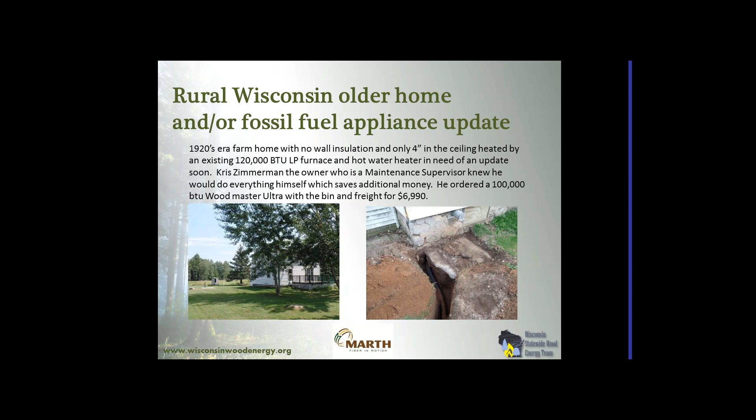That's actually a Swedish manufactured combustion system that's installed in a variety of appliances, from forced air furnaces as well as boilers. This is a boiler, and that controls the fuel to air ratio based off of thermostat demands on the inside.

And so that unit that's totally outside the house with the little bin you see there on the lower right, and he decided he wanted to do bagged products, so he could go buy the product when he felt it was most cost effective for him over the summer months, for pellets in this case. And that's how the basics of the installation look.

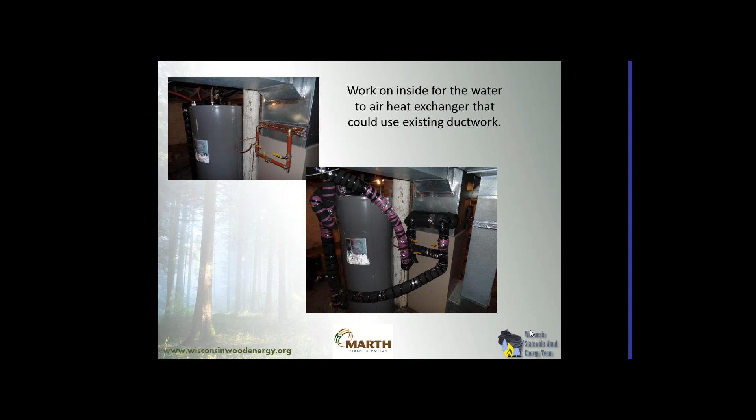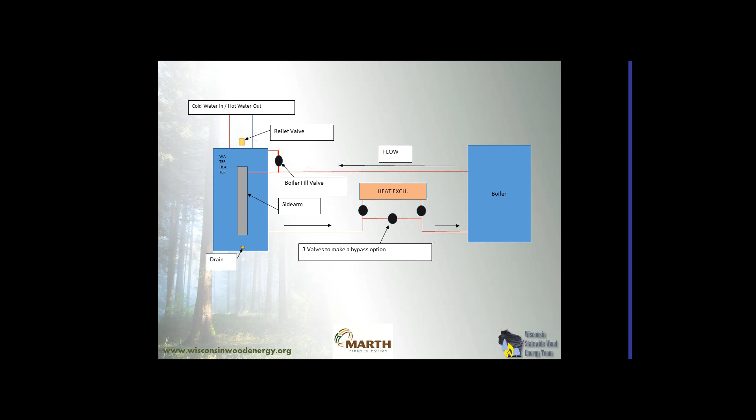If you could move on to the next one, Scott.

And so this just gives you a good idea. Here again, this is not the average homeowner, but it gives you an idea of the recording that he did and validates the savings he's going to have. So for the season so far, he had used about 460 bags worth of 40-pound pellets, and that does both the whole house and the hot water heat. To heat that whole old house, it took about 2.5, 2 3/4 bags a day.

Now, he did add some insulation. Obviously, I think it's been mentioned before, and those of us in the energy efficiency space know that the most cost-effective opportunities are insulation. So he did add some insulation in the walls where he could. He did blow a little more into the ceiling, so that's also probably helping a little bit.

So his range of heating costs were about $225 to $350 a month, depending on the temperature. He figured he'd save probably $800 to $1,000 a year, and so he figured his payback was going to be 4 to 6 years. Now, that's figuring on this year's LP cost and this year's fuel cost.

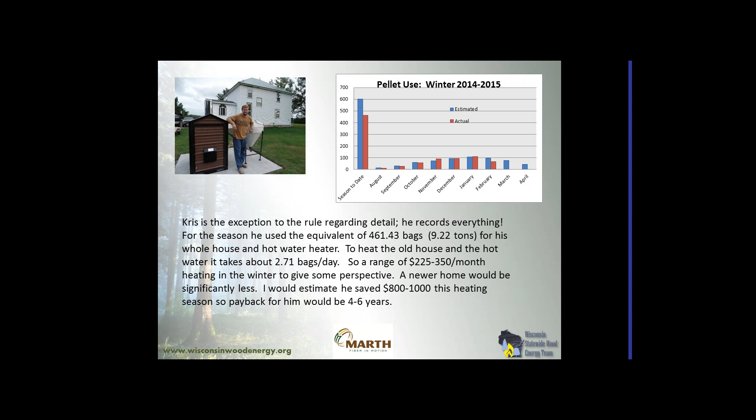So then there's obviously lots of broad variety of small business examples that are off the natural gas grid. This is our biggest opportunity in the biomass heating space. This particular example, I visited Joe Heil, who is in Marathon County. He is a ginseng grower, very involved in that industry, and those of us that are tied in with the ginseng industry realize how strong Wisconsin is in that.

But he has a lot of equipment that you'll see on one of the coming slides in a very large facility, and because he manages a lot of lands for his cash crop as well as ginseng, he has access to a lot of wood. So cordwood for him was a much more feasible scenario.

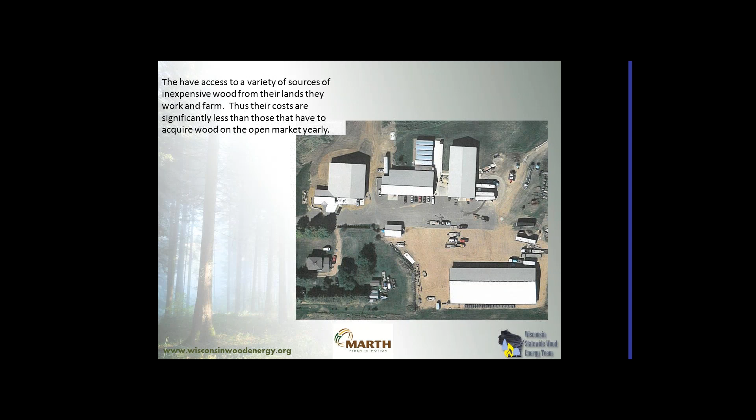If you look at the center of the top of this, where there's a little slab just to the top of the screen, I don't know if you see that, little over, Scott, I can't control it, right up there, right there. That is where he ended up placing, this is a Google map shot, all the plumbing for the underground supply and return hot water lines and return cold water lines for the buildings. And if you go to the next slide, you'll see the type of unit that he used.

Here again, the key to this, as he shared, if you want it to burn as efficiently as it can, and this isn't going to be as efficient as current EPA Phase 2 type products that are going to be out on the market, was having clean, dry material. And so when he burned 1-year air-dried material, he said he had very good success. So you can go on to the next one.

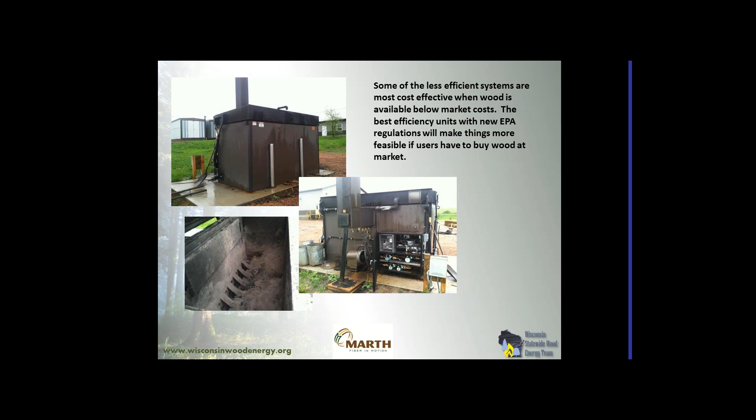They used a comparison thought process in the analysis that Scott pursued of $2 per gallon for LP, and they used set point temperatures that are listed. And this was a facility down in Madison. So if you go to the next, what we're going to do is walk through the different options that you could consider for a scenario like this. And you can extrapolate this out for other scenarios for businesses or buildings that are off the natural gas grid where it might really make some sense.

So one of the things that was looked at is, well, should they just supplement? Should they bring in a little pellet stove heater, a smaller unit, do mainly the supplement at night when they need it? Doesn't even need a thermostat if they wanted a simple unit, have somebody come in and install the unit themselves. And the stove efficiency was in that 80% range, maybe down 70 range, depending on the model. But this is what was calculated for this option A comparison, and they used about a $210 a ton wood pellet cost as an option A scenario. And we'll summarize all this at the end, but that's one option that could be considered.

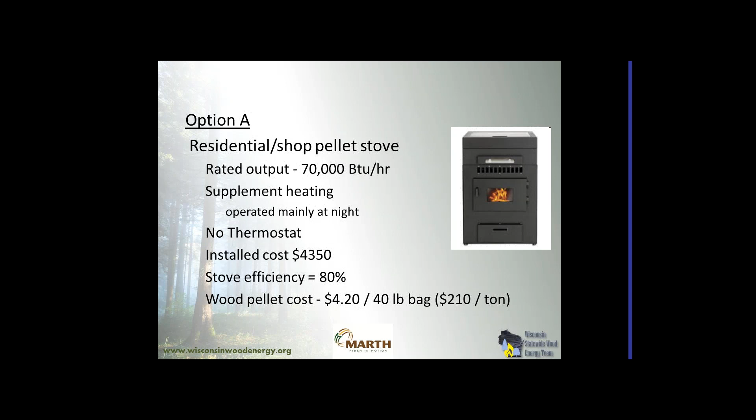So if you go to the next one, Scott, the second was kind of a step up, which would be a thermostatically controlled pellet furnace, a forced air unit. Efficiency would be similar, maybe a little higher, would probably take care of the majority of the greenhouse. The installation cost would be a little bit more because it's a little more intricate installation, but still not as advanced as, let's say, a hot water boiler system. This option would be a pellet unit figured at a similar cost per ton scenario. So that's option B.

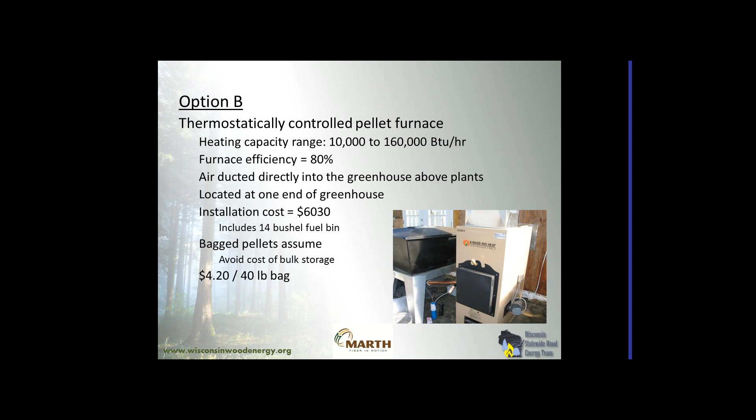Option C would be an EPA Phase 2 type outdoor wood boiler. The one that I have pictured here is an indoor EPA Phase 2 boiler. There's outdoor boilers of that scenario as well. This would take care of the whole load. They would use 2 water-to-air heat exchangers located in the greenhouse to distribute the heat appropriately. Those each would be thermostatically controlled for a little better control.

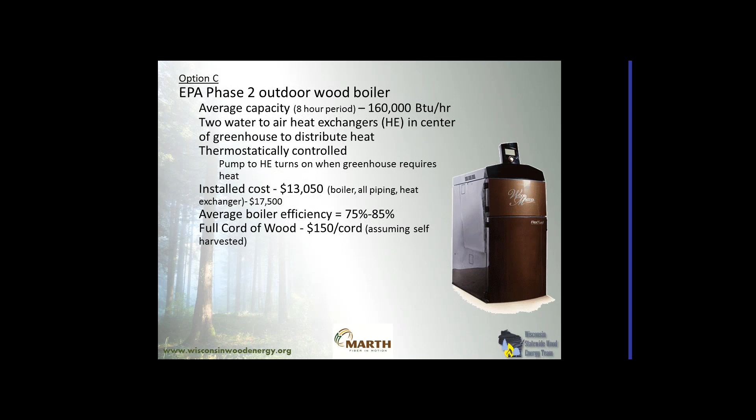Significantly greater investment, close to double what the forced air unit would be, and a little bit more efficiency. However, they would be able to use a little more cost-effective fuel with cordwood if they had a local source that they could get it from. So that's option C at a higher efficiency unit. And then option D would be maybe an older, those aren't going to be able to be used going forward here, but a non-EPA qualified boiler. Little less cost, less efficiency, 40 to 50% probably.

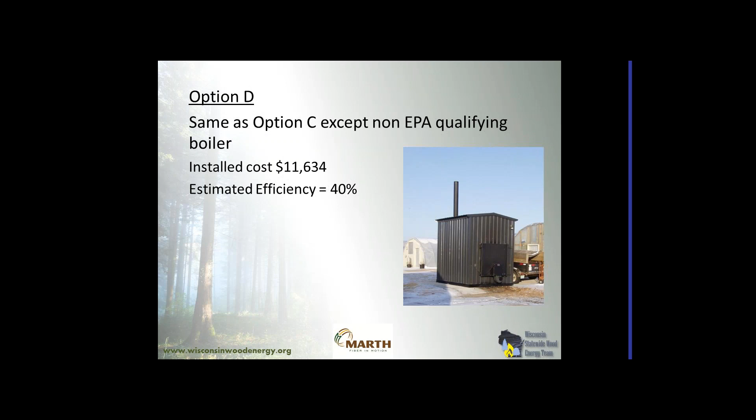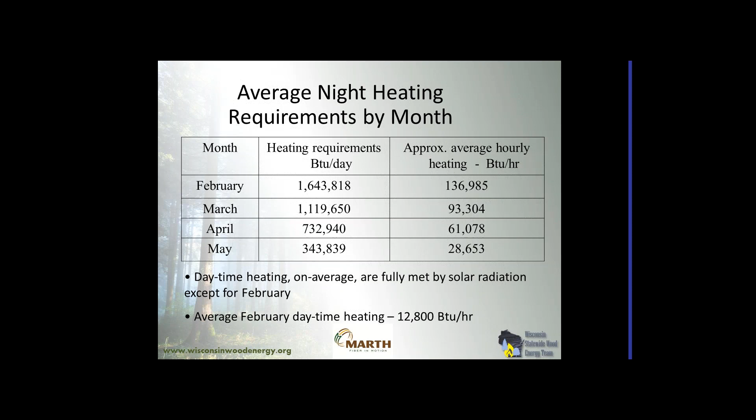And then as we look at the comparisons here, if you go to the next one, Scott, what they did is they took into consideration for those key months the heating requirements, BTU per day that would be needed, and then the approximate average hourly heating per hour, and made sure that the units were appropriately sized. And they did this by monitoring their current fuel use, verifying heat output, and looking at heating degree days over history, and making sure that things were appropriate. You can go on to the next one, Scott.

So what I did here before the final summary is, you basically have option A. You could do supplement, and you estimate 50% of your propane use, because that would be supplementing your night heat. So that's option A. B, C, and D take care of 100% of that need, down to 10 degrees, 5 degrees, something like that, and then the propane would just supply any of those peak needs. And so you can see the summary of the project prices from the pellet stove onto the non-EPA wood stove, the efficiency variances on those types of units, and then the cost per million BTU of the fuel.

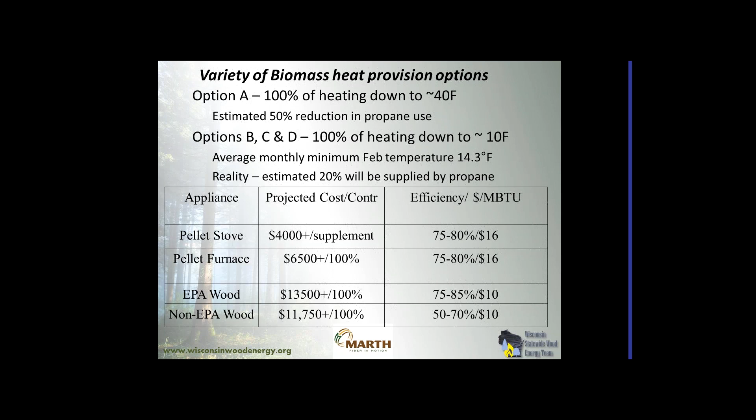So obviously the raw wood would be less per million BTU, but if you go to the next slide, we'll see that if you look at the whole analysis on a baseline of what traditionally was used for propane at about 1,500 and what they typically put out per year, again, looking at the system cost, the biomass quantity needed, and then the actual energy cost of each of the fuels and what that would offset or what that might require in terms of propane for those peak times. If it's going to do virtually 100%, there was significantly less propane obviously needed just for those peaking times. And you see the total cost of propane and therefore the total savings column.

What would be the best opportunity in this scenario is really up to the buyer, the user, and what their priority is. And I'll go through a couple other examples, but in this scenario, what was the least expensive non-EPA wood boiler system is not necessarily the best payback system because of the lesser efficiency. And that's really what I wanted to illustrate here, is that sometimes greater investment up front is a little bit wiser, and then it also depends on how much interaction you want to have with the appliance.

Anytime you're going to burn biomass, you're going to have ash, and depending on the type of fuel, cordwood or pellet or chip, there's a difference based on the fuel quality, the type of ash cleanout you're going to have, and that's something you got to think between your maintenance staff or you as an owner, what you want to invest in on a weekly, bi-weekly basis to take part of that. So that's a greenhouse comparison option. You can go to the next one, Scott.

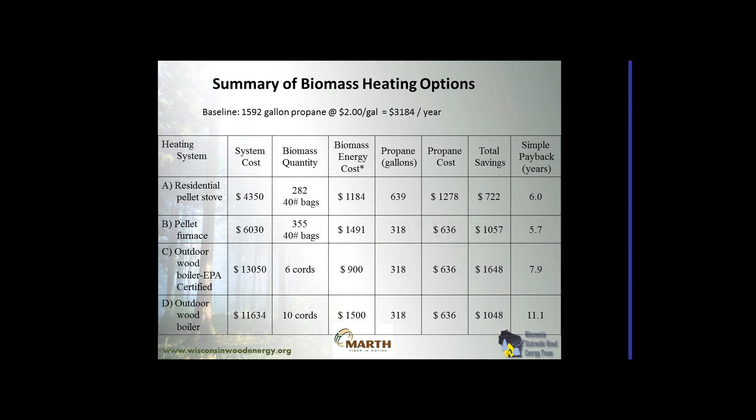So this is kind of an exciting project for us here in central Wisconsin. You know, many of these projects, which is the purpose of our statewide energy team, is to kind of inform and advocate and educate on some of these opportunities. Some projects are self-initiated, like the first one I told you about, which was the residential homeowner that knew he could save money by getting off of fossil fuel of LP, and he installed it himself. And others need to be informed a little bit and kind of shared the opportunity.

And I was fortunate enough to have a friend and a colleague that works at the Marathon County Park Department, and we just started talking last year and looking at facilities that were off the natural gas grid. And in Wausau, which is a city area, the majority are on natural gas, so it's hard to justify those in many scenarios from a cost-effectiveness standpoint.

But this particular facility is a 4,500 square foot facility that houses a ski and snowshoe chalet out in Nine Mile Forest, which is a 4,900 acre area for trails for recreation, and Badger State Games and so forth is held there. And there were two 20-plus-year-old LP forced air furnaces providing a total of 240,000 BTU of heat for that facility. The facility was built in two phases. Every scenario and installation is a little different, so we had to look at how we could plumb this.

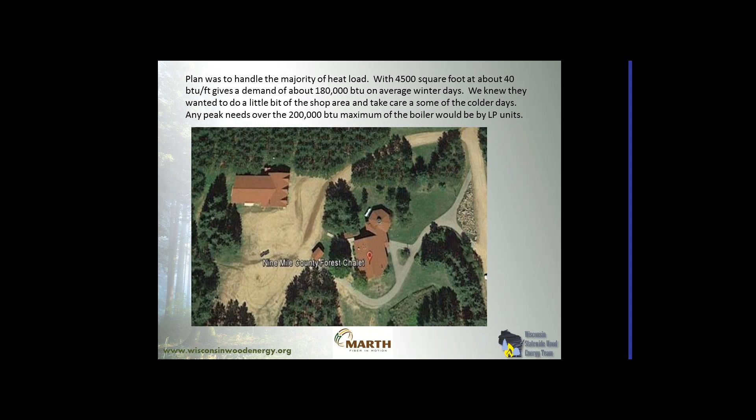And then if there were any needs, if the temperature dropped, it was set so that the LP boilers would kick in and take care of those peak days, you know, if we had 20, 30 below days. If you go to the next one, Scott.

So this is actually right out of the notes from the county person that I worked with. Dan and Greg were great to work with there, and what they did is they used some fairly conservative averages on a low estimate of what they had for propane usage and pricing from previous years, and then they calculated based on what might be a lower delivered price per ton for pellets with the delivery, and came up with a savings of about $1,800.

And then they went to a higher estimate for propane as well as a higher estimate for pellets. Here again, lots of assumptions in all of these scenarios. They assumed that, you know, if the pricing for propane was up, it's likely the pricing for pellets would be up. So they wanted to give equal credence to the appropriate market for that year. So for that high estimate, they still figured that there would be about a $2,100 savings.

So when they started to talk about the project costs as a whole with their time doing the trenching, because they trenched from that back shed where they were going to put the boiler itself, which I'll show you a picture of pretty quick, all the way to the front. They had to account for their county people's time to do the trenching. They could do the work themselves, but they still have to bill themselves internally. So with all of those things in, they estimated that they might have $36,000 for this unit tied in to the system.

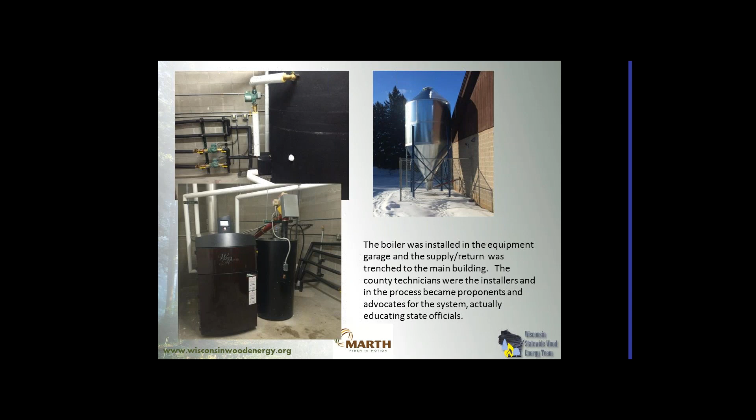You can go forward if you want, Scott.

Another example would be a U.S. Forest Service facility, which was brand new. This particular facility was in Walker, Minnesota. It's a National Forest Ranger Station. I think this is less than 18 months old. Again, this was a pellet unit.

And what they did, they projected, you'll see in this summary, the annual fuel use is to be determined because this is really their first full winter, so we don't have total numbers. I do have some things from the facility manager there that I'll share with you in the coming slides. The old facility had propane.

Being a Forest Service facility, they wanted to support the industry that they were in with managing the national forest, and they felt that this was a good way to do it without having some of the additional effort that might have to be put forward into doing a wood system, which would have worked great because they're in the middle of the national forest, and a chip system, which is usually a little more upfront investment. But this is what they decided on.

It's a 272,000 BTU unit, and I'll show you some pictures in the coming slides of the bin and the boiler itself.

You can go forward, Scott.

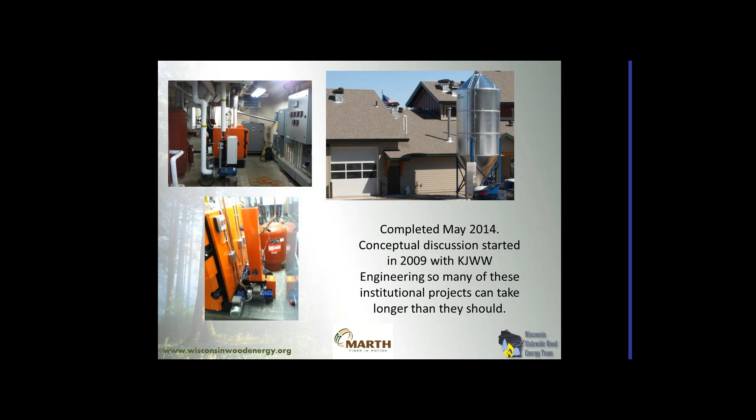So this is the unit in Walker, Minnesota at the U.S. Forest Service Ranger Station. These systems of this size take many years. I started talking with these folks in 2009 at KJWW, which is an engineering firm in Madison, and it just took many years to unfold the project as a whole, but even with the biomass boiler portion of it. So it's many times an educational path that takes some time.

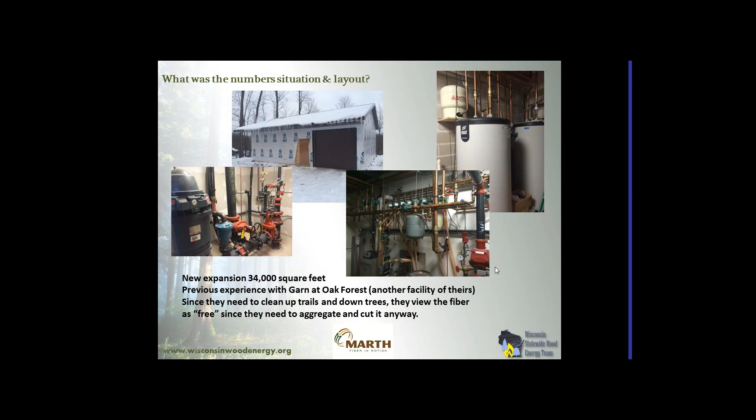And the time that he takes to invest in doing this was once in the morning and once in the afternoon and strolling through at lunchtime just to make sure all is well. So here again, natural cordwood unit took a little more investment in time, but in their situation, it ends up paying off quite well, which you'll see in the numbers.

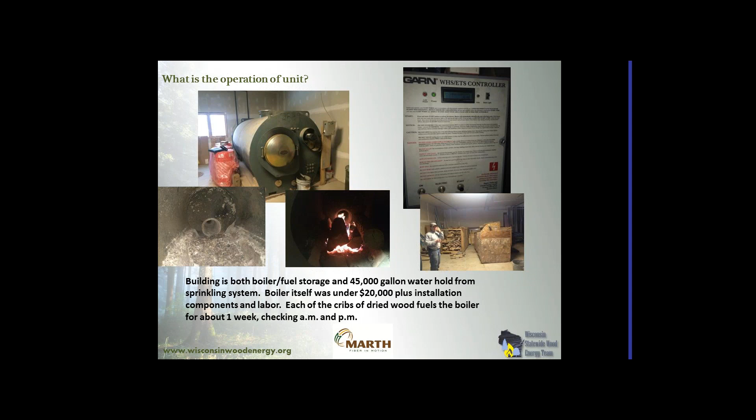And he was realistic, because he hadn't gone through this analysis, but he said he really should, and so we went through this together, which was kind of nice. Even though they don't consider their wood to be a cost, he attributed about $50 a cord, because somebody's got to go gather it, and they've got to have the time to stack it and do all of that.

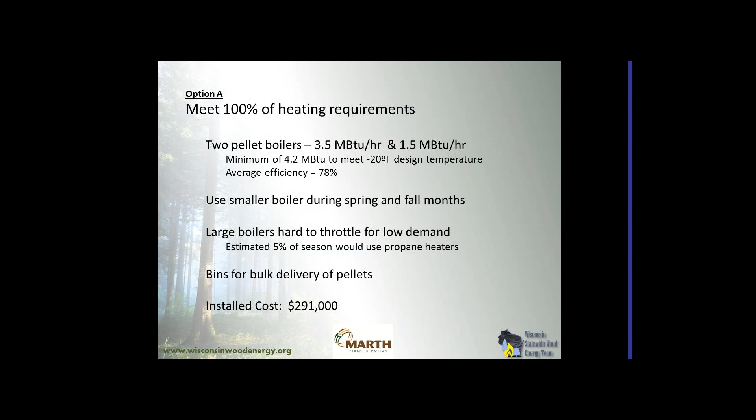was taking care of the majority, 80%. So they'd use the smaller boiler for the shoulder months in spring and fall, and the large boiler with the smaller boiler to take care of the majority in the winter, but then use maybe 20% propane instead of just a couple percentage points for peaking. So that was about $80,000 less of an investment. And for a small operator, that might be, in many business scenarios, very enticing. And that's what it turned out to be in this one.

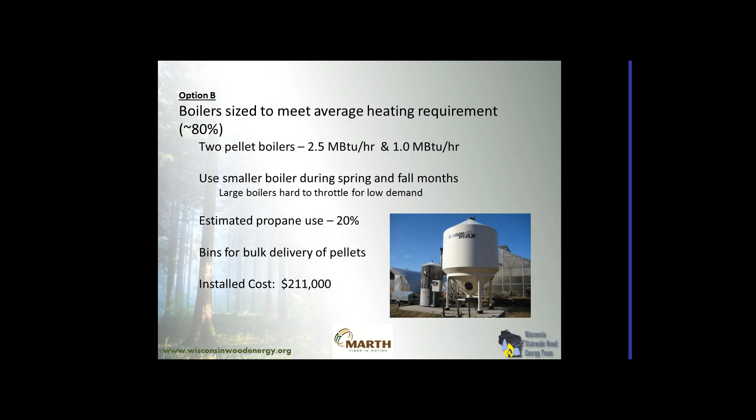So if you go to the next slide, Scott. In this scenario, it actually turned out to supplement the majority rather than all was more cost effective if you look at the tons of wood pellets that would be used, the propane cost, the energy savings, and what that payback would be. So in this scenario, the better payback was to get the smaller unit and to supplement a little bit, 15–20% with propane, and that's what he ended up doing.

And having talked with him in the past, he's had this system there now. He's fortunately retired since, but he was honest enough to share that without this biomass heating system, he probably would have been out of business sooner. And fortunately now he was able to sell out to another facility that has many greenhouses. And so he viewed the lesser investment as less risk, and it worked out very well for him.

So one more scenario. Actually, I have two more. There's a scenario, just in summary, a Cherry School, which is in Iron, Minnesota. Population of that particular school had grown over the past few years, and they were trying to determine how to best plan for the future. The 87,000 square foot school, and they really wanted, because they're up in timberland, to supplement with wood heat of some sort. Again, because there's a concern, perception-wise, for certain school districts and boards, sometimes pellets are an easier transition. That's what ended up happening at this school.

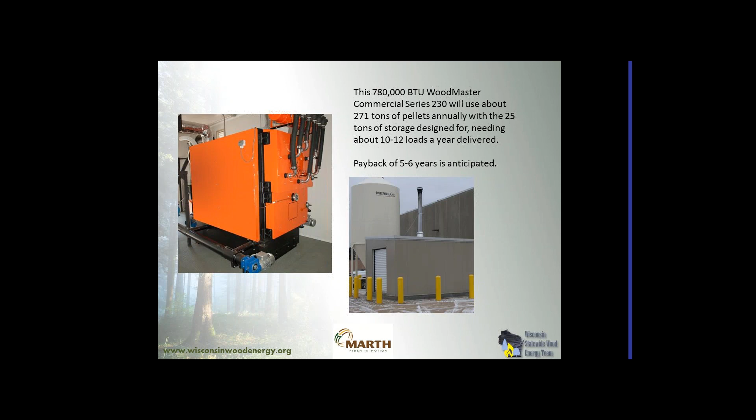And this unit turns out it was an environmental learning center. This is a very beautiful facility. Our Heating the Midwest conference actually had a tour at this facility. They previously had a 100% cordwood system. You can see they're surrounded by woodlands, made a lot of sense.

But in their future plans, to try and utilize people a little differently, because the staff on the maintenance side had to process and handle 160 to 200 cords a year of wood, they decided they wanted to go to something a little less labor intensive. They looked at chips, they looked at pellets, they ended up deciding on pellets. And because of the automation that was part of this system, they could utilize that staff differently on the grounds. You go to the next slide.

And this really ties into this learning center. Their mission really is to allow people to have learning happen when they experience it. And so they have a variety of renewable energies that are part of this facility at this environmental learning center. It's a very impressive facility, but the heat that this pellet boiler provides is for domestic water heat for 2 dormitories, a dining hall that seats up to 380 people. So it's a fairly good-sized facility.

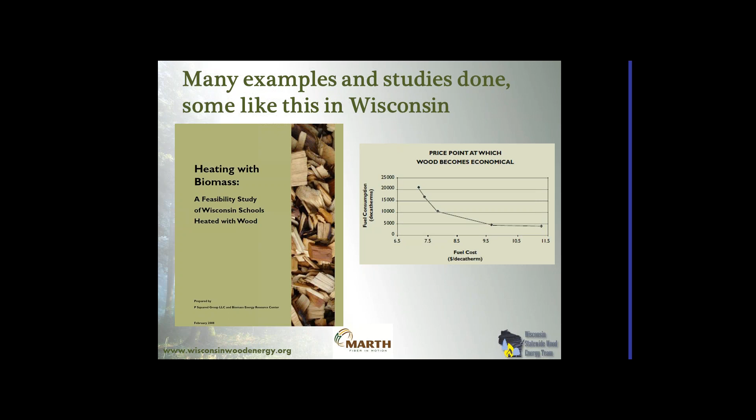The little chart on the right was just basically a sensitivity summary that was in that study that illustrated that, when you use a lot more energy, the fuel cost needs to be lower. So that's when you have larger systems, whether they're larger commercial or industrial systems, that's when chips make a lot of sense. And I didn't go through a lot of chips examples because I'm dealing with residential and small commercial, but as you get to that, in my mind, and every situation is a little different, is that 3 to 5 million BTU range, chips really become plausible depending on the size of the unit and what their priorities are.

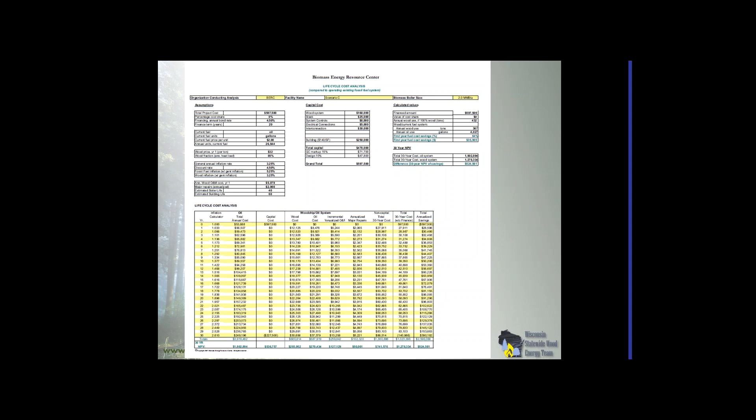You can go to the next slide. This was just a quick copy. I don't expect you to read this. Don't worry about the details. But in this study that was done, that heating with biomass, they get into the deep numbers, and this is the kind of analysis that was done. So if you have some larger projects and you'd like to see some examples of those analysis gone through, like Scott mentioned in one of his previous webinars on the tools and the grants and that sort of thing, they've done some of this, and it gives you a good example. The next slide, Scott.

This was one example that was in there, and it just was good in that it gave you an example and confirmed when you're off the natural gas grid, oil, LP, electric is where our best opportunity is. And so this was a life cycle analysis they did for a school that was on oil, looking at green wood chips at 32 a ton or 43. And if you go to the bottom line, over a 30-year net present value of savings or the difference in cost, you have a huge opportunity for savings for, say, a school district or a small municipal building or something like that.

So I don't want you to come away from this thinking that, oh, you should only use pellets. Well, no, that's just in these scenarios. I don't want you to come away that you should only use cordwood the way that Camp Forest Springs used. It was in their scenario that worked best with the resource they had. And there are definitely opportunities where wood chips work, but many times they tend to be a little larger system. But as technology continues to evolve and improve, I think the size of those systems comes down. So next slide, Scott.

So just wanted to remind those of you that were on here or those that might be listening to this webinar at a later date, there are other webinars that we've done so far and some that will be coming that will give you additional insights on smaller and larger projects, as well as information on district heating and other things related to wood energy, wood heat. So keep those in mind.